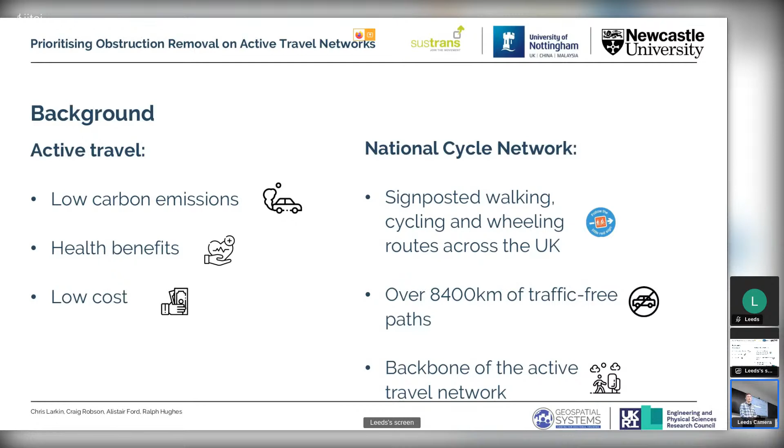So briefly, just a bit of background on active travel networks, particularly in regards to the UK. Active travel, walking, wheeling, cycling, is kind of the low carbon, health beneficial, low cost alternative to motorised transport, which is gaining quite a lot of traction. You see it in places such as the Netherlands, where it's really effective. Within the UK, we have the National Cycle Network. This is sort of the backbone of active travel within the UK. It's got over 8,000 kilometres of traffic-free paths, and it's really important for people getting around.

However, there's a lot of problems with the National Cycle Network as it is at the moment. There's over 5,000 barriers, or obstructions with a width less than 1.5 metres, which is the design standard stipulated by the Department for Transport. And these barriers aren't fair to all of the users. If you're in a wheelchair, if you have a pushchair, if you have an adapted cycle, or even if you just have a normal bike, it can be really difficult to pass through these obstructions. And even for people who can pass through, it's a big deterrent stopping them from switching from their car to active travel.

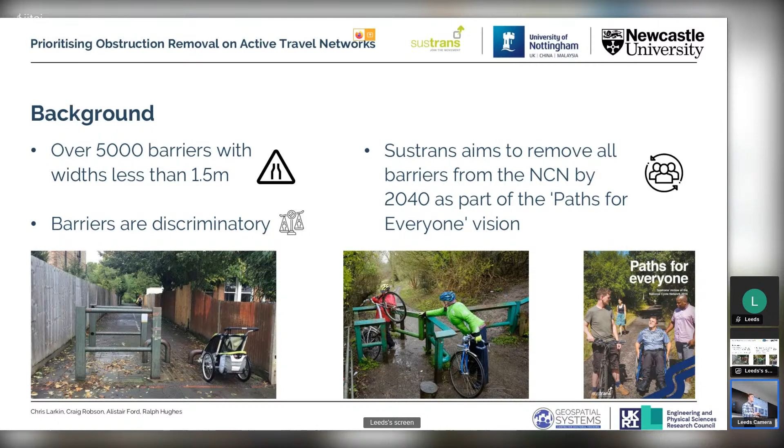Sustrans are the custodians of the National Cycle Network, so they manage it, and they have an aim to get rid of all of these barriers by 2040. However, they can't do them all at once, and you need to think about where you can get the best gains quickly in order to access these benefits as fast as you can. So essentially, this project aims to determine the order of the removal of these obstructions on active travel networks. So how did I actually do this?

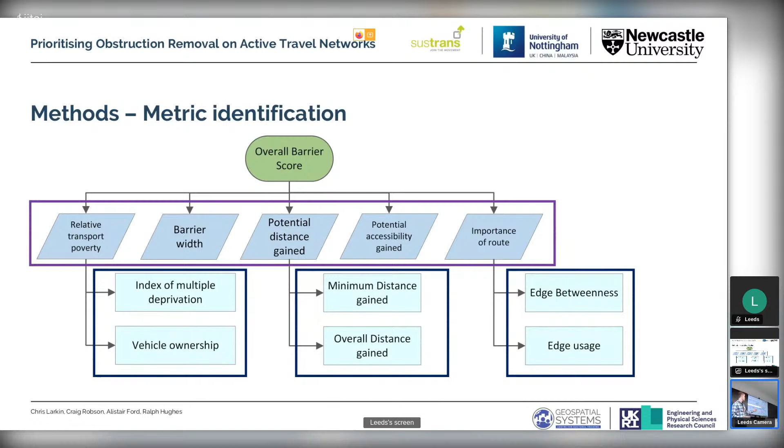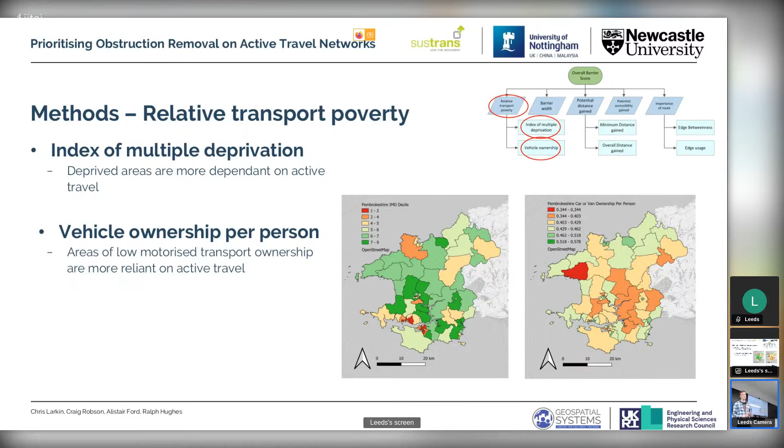The first metric that we considered is the transport poverty in the area that the barrier is located in. So we looked at the LSOA in which the barrier is located, and looked at the index of multiple deprivation, which is sort of a poverty score, and the vehicle ownership per person. This is because poorer areas are more likely to use active travel, so therefore are adversely affected by being limited to use these corridors.

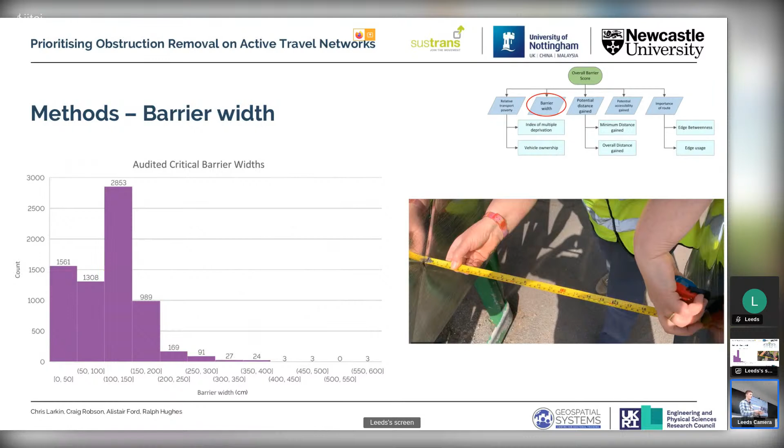We also looked at the barrier width. A load of volunteers from Sustrans who collected the data set went out and measured the critical width, so the minimum width you have to be to fit through a single obstruction. As you can see, the vast majority of them are under that 1.5 metres, which the DfT wants them to be larger than. So we're not doing a desperately great job there. We also looked at the distance that you gain on the National Cycle Network from removing these barriers.

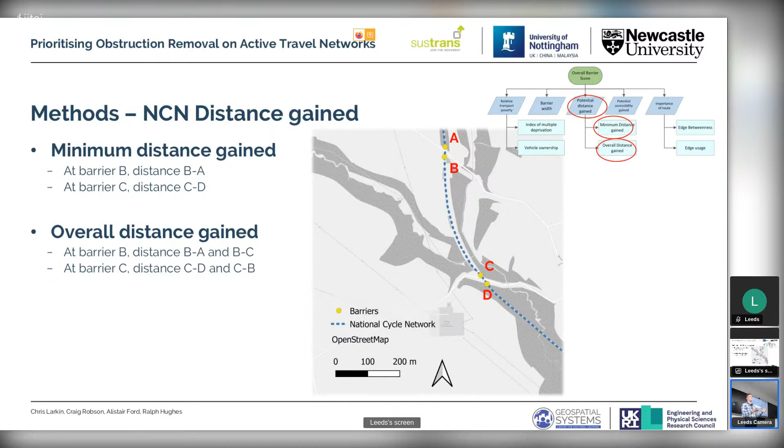So that's the minimum distance gain, so as soon as you reach a new barrier, and also the overall distance gain, and particularly at junction points that can be in 4 or 5 different directions. We also created a metric to look at the accessibility gain of before and after the barrier's removal.

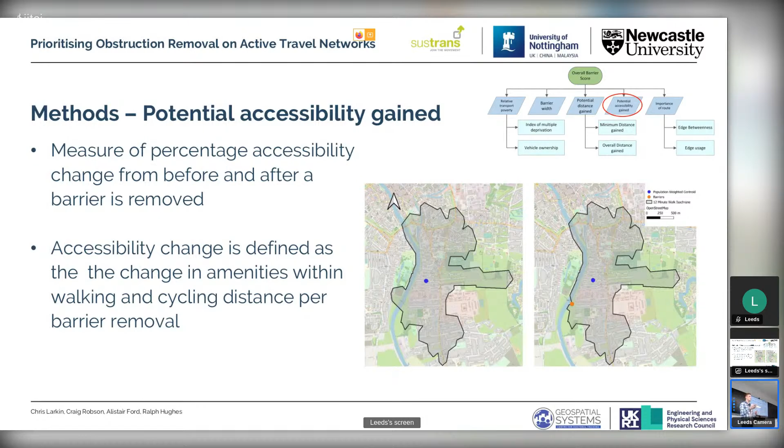So we looked at the number of amenities that you can access within a 15-minute walk or a 15-minute cycle from a location, and then compared it to once the barrier has been removed from the network. So you can see you can get over to this side of the river once the barrier is removed, but you couldn't previously. So any amenities, hospitals, schools on the other side have now been unlocked by removing this barrier.

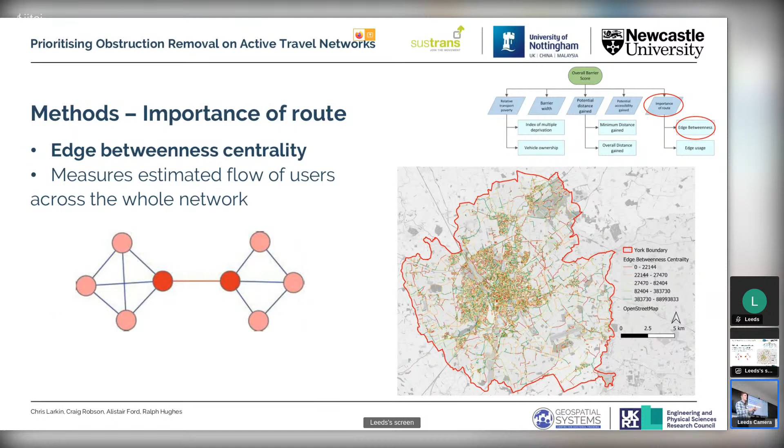We also borrowed some stuff from graph theory to measure the number of users who are flowing through any point on the network to try and determine how important the obstruction is in regards to the number of people passing through. So the first way we did this was using betweenness centrality, which is basically just a graph metric which tells you the importance of an edge within a network.

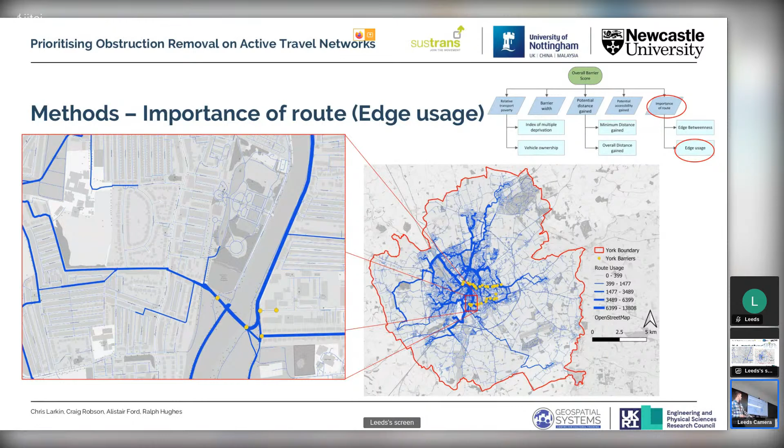We also created this one called edge usage, which, using census data from the travel to work origin destination matrix, you can work out where people are actually traveling within a city and therefore give it a score. So for example, seeing a lot of people passing over this bridge where there are barriers on, so obviously those barriers are going to score pretty highly.

Then we consulted a load of stakeholders from Sustrans to keep them in the loop, and they basically scored all the metrics using an analytical hierarchy process, which is how you pair off different metrics versus each other to determine an overall score. So what did we actually find when we did this? Well, for a start, the stakeholders really liked the barrier width and accessibility gain metrics. They thought they were really valuable in determining the latent demand, so the demand that we don't currently have, but we might have in the future.

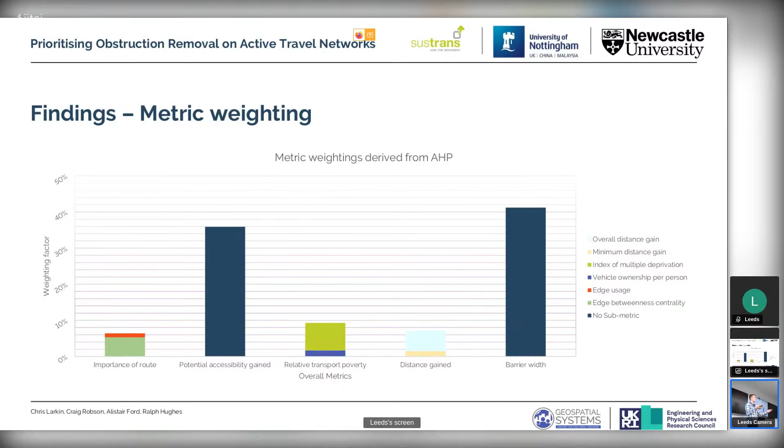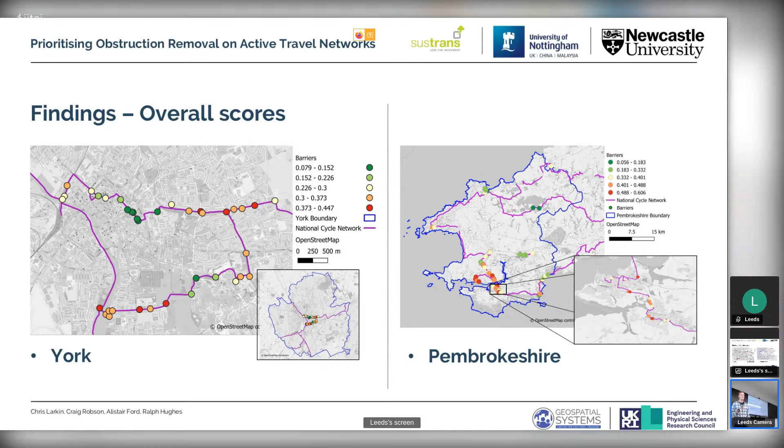We applied this to 2 different study areas to see how it works. So we had York and Pembrokeshire, both different in spatial and demographic characteristics. And as you can see, we get these clusters of high scoring barriers that need to be removed pretty quickly. We can confirm that these clusters are actually clusters by using local Moran's I, and we can see that, yeah, those clusters are prevalent.

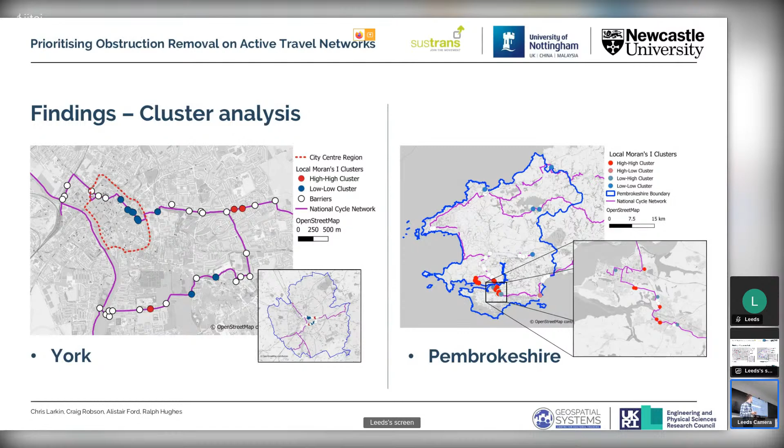In York, we see them on the exterior to the city centre. The barriers in the city centre don't really matter because you've already made it into the city centre, but it's the ones allowing you access into the city centre that were important. In Pembrokeshire, it was the ones in the populated areas, it's kind of what you'd expect.

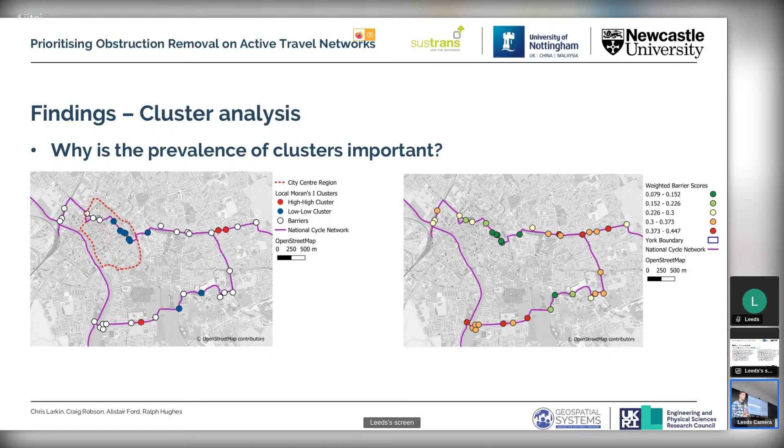The clusters are important because when Sustrans actually go out and remove them, they don't want to be removing barriers at random locations. It makes much more sense to do it in a coherent fashion. So if you identify where the clusters are, you could then remove those ones in that cluster first in order to essentially open up the network as best you can.